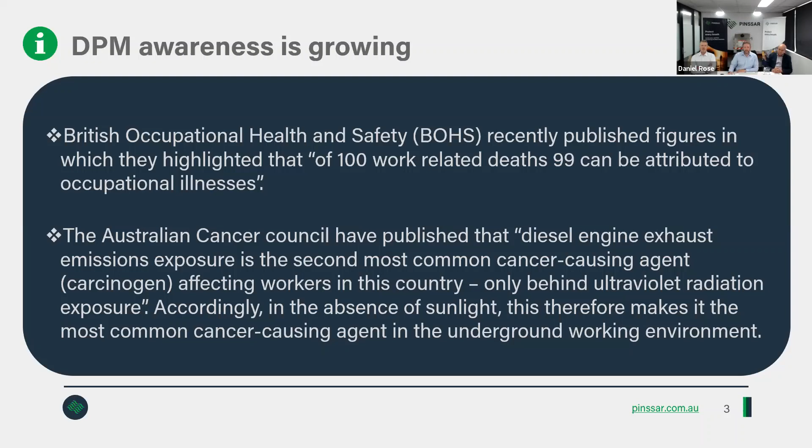They've published that DPM, diesel particulate matter, or diesel exhaust emissions, is the second most common cancer-causing agent in Australia, only behind ultraviolet radiation. So obviously, when you're working underground, you don't get exposed to the sun. So therefore, working underground, DPM is the number one cancer-causing agent in the workforce for underground workers. I'm sure that's very similar for operations around the world.

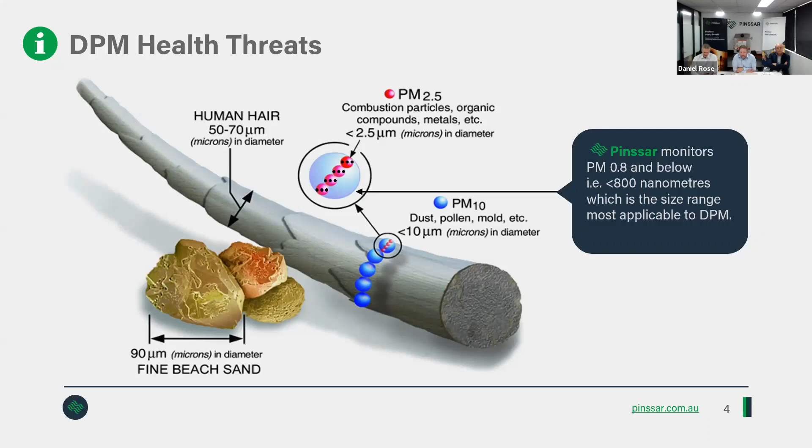You can see there the PM10, the blue dots, and that's your pollen, that type of stuff. And you can see the pink on those blue, which is your traditional dust particles that we monitor, PM2.5 and under. And then you can see some tiny black dots on those pink dots. That's representative of DPM. So again, quite smaller than the dust that we're monitoring. Comes in under 0.8 of a micron, or 800 nanometers, and is invisible to the naked eye. So very, very small.

And how that affects health: as you can see there, in 2012 the World Health Organization declared DPM a Group 1 carcinogen, the same risk category as asbestos. And you can see in that picture that the dust particles that, rightly so, are getting a lot of attention underground recently get caught in the human's natural filtering system, the lungs being the worst case, and that's where the potential for crystalline silicosis can occur.

But if you see to the right of that, the even smaller particles, being DPM, go through all those natural filtering systems of the throat, the nasal passage and the lungs, and directly into the bloodstream. Now you're talking about carcinogenic material getting straight into the bloodstream. That certainly is not what we're here to achieve. So having awareness of your DPM loads, and then making adjustments to your controls to bring those loads down, is certainly the best way to manage DPM.

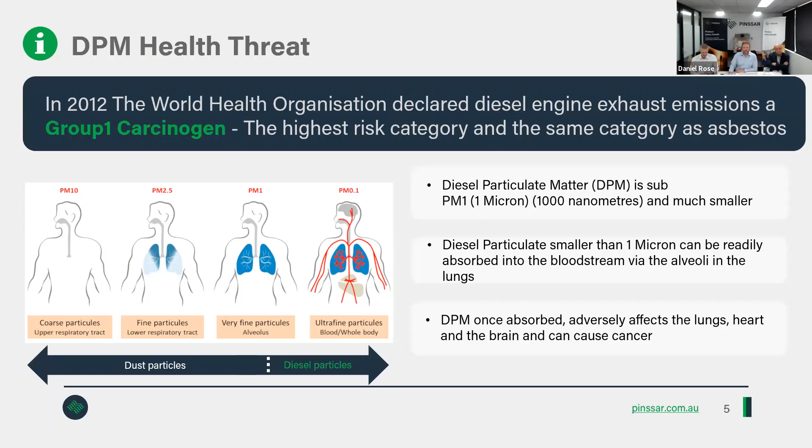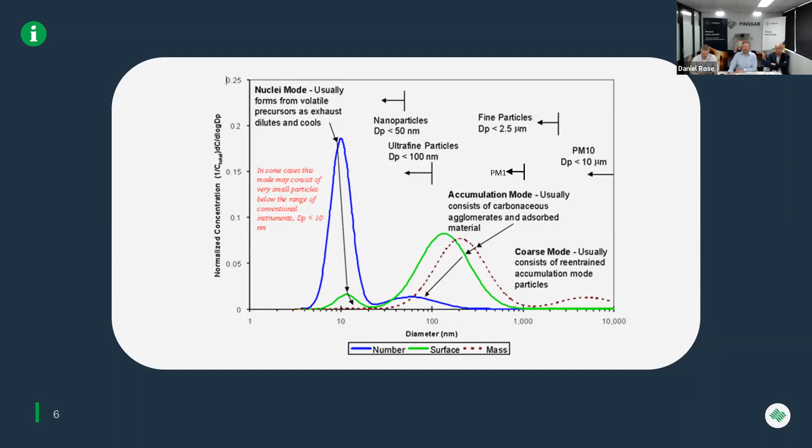But as it hits the atmosphere, the DPM particles agglomerate. They find each other and quickly stick to each other. So this peak is as it's coming out of the combustion process. Once it hits the atmosphere and starts to cool, they agglomerate, so the number of particles goes down because they're now joining together. But the mass and the surface of these particles increase. We're still talking about very, very small particles, still well under 1 micron. But that's where the workplace sees DPM in those atmospheric conditions.

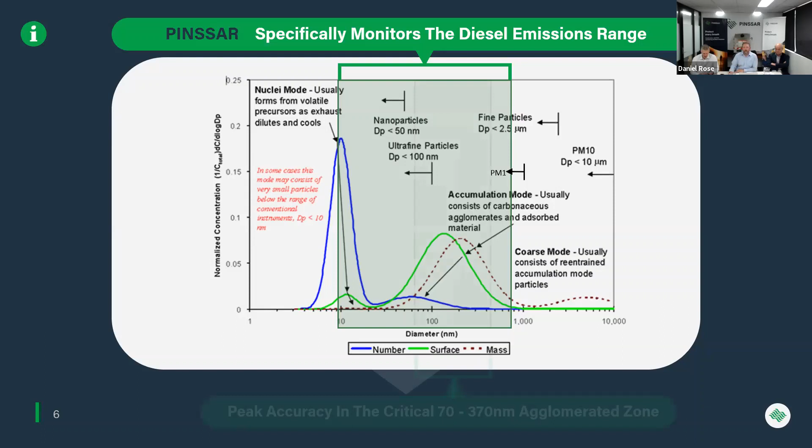So the monitor that Pinssar have developed is built from the ground up specifically to look at that range, and the peak accuracy, or where we focus the laser, is in that zone where the mass is at its peak. Most dust monitors, or in fact all dust monitors, rightly so, focus on around 1 micron and above. Their range can come down to around 700, but as you can see, they're not hitting the zone that you need to for DPM.

So there is some misconception out there that you can monitor DPM with dust monitors. Some can be fitted with devices to make that happen. But in terms of continuously monitoring DPM, there isn't anything else available other than the Pinssar that's been developed.

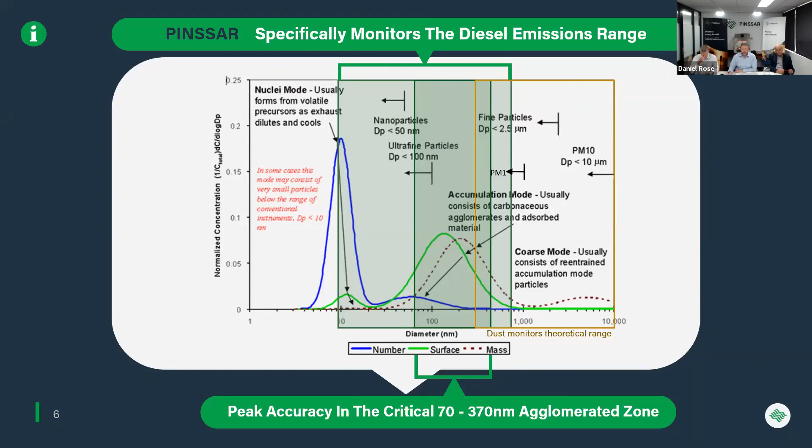So a very quick shot of where Pinssar started: it was around 2012, just after the World Health Organization declared DPM a Group 1 carcinogen. Francois, the managing director here, was working underground writing diesel management plans, and got the question from a mine manager: okay, we've got these plans in place, we're spending a lot of money, but how do we know that these mitigating devices such as filters and ventilation are working? And Francois said, well, you measure it. And he said, that's all good and well, but there's nothing I can find that can measure it on a continual basis. So that started Francois's journey.

He researched and came to the same conclusion, and then decided to partner up with a guy called Peter Knott, a very well respected hygienist in the industry here, to try and come up with a unit that would measure that, which took quite a substantial time. Part of that journey was getting in front of mines and tunnelling operators and understanding, if they were going to design something like this, what would be required. The number one constant that came back was low maintenance and reliability. They don't want to be maintaining these units on a regular basis.

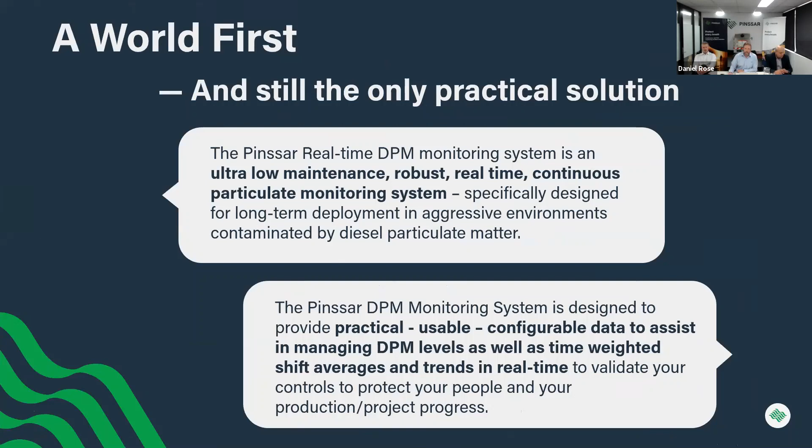So fast forward to 2018, it was commercialised, and these days we've patented it with 23 unique innovations. The Pinssar system basically consists of two things: the sampler, or the reader as we call it, and the dashboard. The sampler goes underground. It's the robust, low maintenance piece of equipment, and the dashboard is very configurable. It can go on a laptop, an iPhone, or through your SCADA system into your control system. So there's the reader, and there's the dashboard.

So just take a look at existing methods of monitoring diesel emissions. There's three main methods. One's tailpipe testing. It's a regulatory requirement. It's usually done in a controlled environment, such as a workshop on the surface, getting the engine to the right temperatures and things like that.

There's personal monitoring, again, a regulatory requirement. And that sits on your lapel or the collar of your shirt and takes samples of the air as it's breathed in. Unfortunately, once the person underground has handed that to the hygienist, it takes 2 to 6 weeks to get a sample back. And that sample will say, yes, you've had an exceedance, or no, you haven't. And even if it says yes, it doesn't say what part of your 8-hour shift you had that exceedance.

And then there's the ambient handheld monitor, which is great for taking underground and doing random checks and getting an understanding of the area. But all of these are random and intermittent and point-in-time validations of the conditions. So with any of those technologies, you're unable to manage your controls. So that's where continuous real-time DPM monitoring comes in.

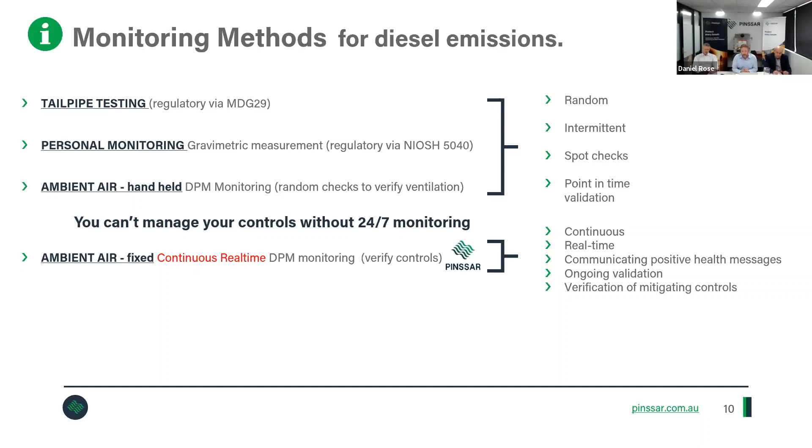And obviously you're getting a continuous picture of the ambient conditions underground, and you can move in relatively quick time if you see the trends moving to make some alterations. And ultimately the goal is to not get to exceedances. So if you see that trend heading up, you can do something about it before it becomes an exceedance.

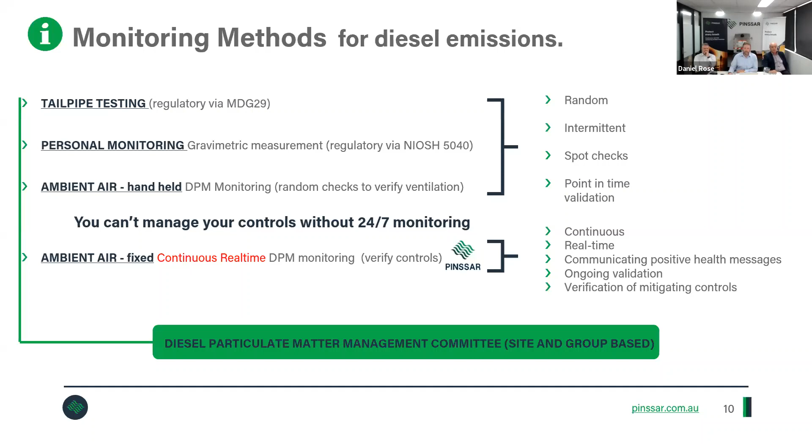We recommend that all those technologies are used, as in the DPM management committee. All great pieces of information that go to decision making. We're certainly not saying that Pinssar replaces any of those existing technologies. They are required from a regulatory point of view and do provide some important information. So Pinssar are now across 6 continents and going well globally, mainly in mining, but certainly tunnelling is doing an uptake.

So we'll jump to some regulatory support information. Obviously 2012 was when the World Health Organization declared it a Group 1. Since then, there's been advancements in tier engines and specific companies lowering their OELs or exposure limits, and then just through different periods. This is a bit Australian and English specific. The states in Australia have changed their levels, and then Canada we've got here.

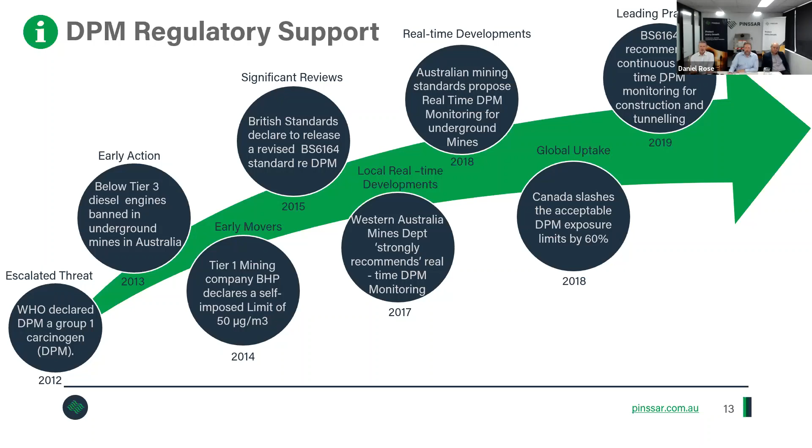But really, the big one that's starting to change the game is the British Standard 6164. So in 2019, they made a revision in that standard. Previously, that standard had not even mentioned DPM, but now it calls for real-time monitoring of DPM. Also in that revision, it put dust in as continuous monitoring required as well. Previously dust was called on, but not continuous monitoring of dust. So the British standards have now put those together, and they're saying it shouldn't be one or the other, it should be both. And calling for atmospheric monitoring.

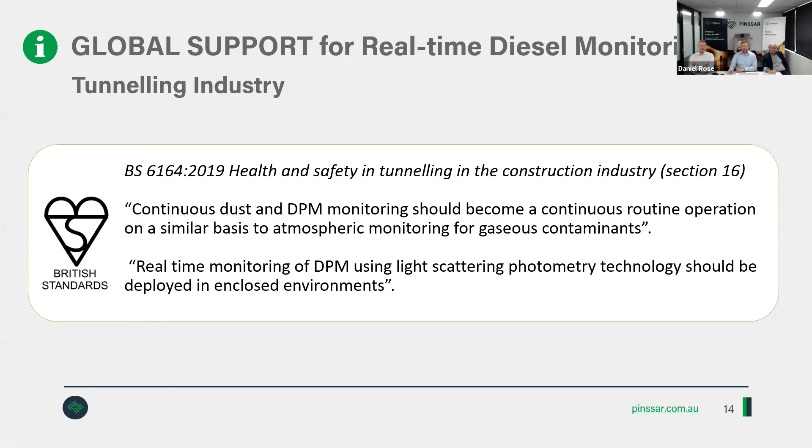So in terms of tunnelling, what that's led to is the project that's currently on in the UK, the HS2, one of the largest tunnelling projects in the world, and there's four different joint ventures there. As you can see, a lot of the major construction companies from around the world are involved in the HS2 project. And so the client, HS2, has specified continuous DPM monitoring in their tender documents, and therefore those contractors have obliged to that. It's still early days, only in the first mile of the first of 4 packages, but continuous monitoring of DPM will be a part of all 4 packages. So certainly setting the gold standard for the tunnelling industry worldwide.

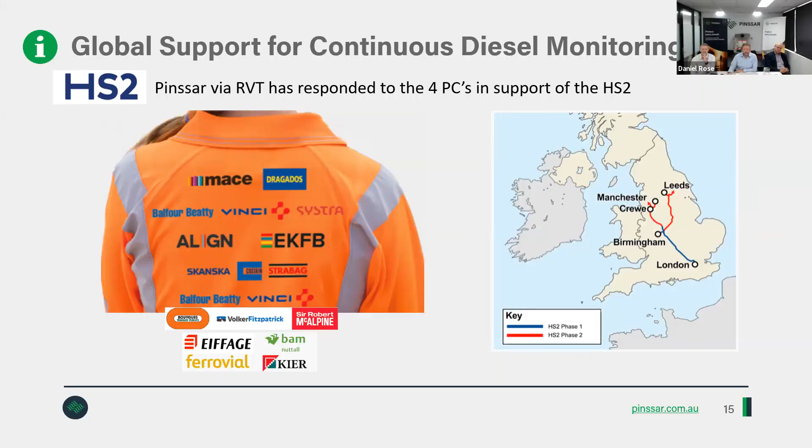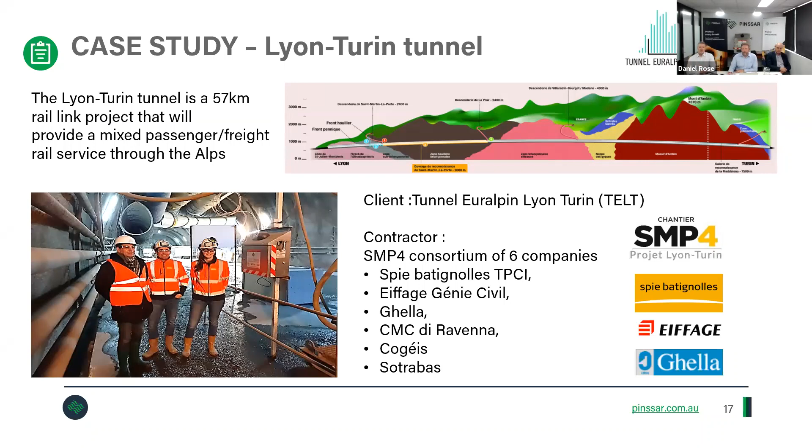So we'll run through a case study in tunnelling. This was a joint venture in Europe, under the Mont Blanc in France. You can see the contractors listed there, again some major players. So this is the TELT project, which is a 57-kilometre rail link under the Alps. The SMP4 scope, which was that joint venture of the first part of this project, consists of 9 kilometres of TBM and 3 kilometres of drill and blast.

And it was the drill and blast section that they were anticipating would produce a higher level of DPM, obviously higher than the TBM, but they felt that this may be higher than what they were prepared to handle. Thought it was an unreasonable risk to the workers. What they'd done prior to that is monitored gases and also personal monitoring, and some dust monitoring as well as weekly airflows, but not real-time continuous DPM monitoring to date. So they did some research, found Pinssar.

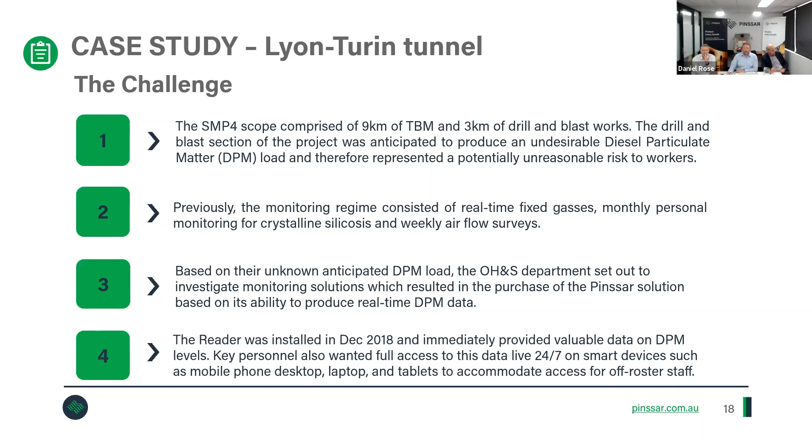The reader was installed in December 2018, and they immediately saw some benefits. So they started monitoring for 3 weeks. They averaged 180 micrograms per metre cubed. Then they stopped for Christmas for 3 days, and we'll show you a shot of the dashboard next.

And then the monitor kept monitoring over Christmas break, and that dropped down to 10. So they saw the difference between 180, which is well above the industry standard of 100, down to 10 over that period where they weren't working. So they came back from Christmas, they evaluated the data and the results, and they decided to do an investigation to get a better understanding.

Turns out in this instance, middle of winter, under the Mont Blanc, conditions are quite cold, and the operators had turned the ventilation down to become more comfortable, unbeknownst to them what effect that would have on the DPM load. So as I mentioned earlier, it's invisible, tiny particles. The guys turn the vents down. They think they're doing the right thing, but obviously increasing the risk of health problems.

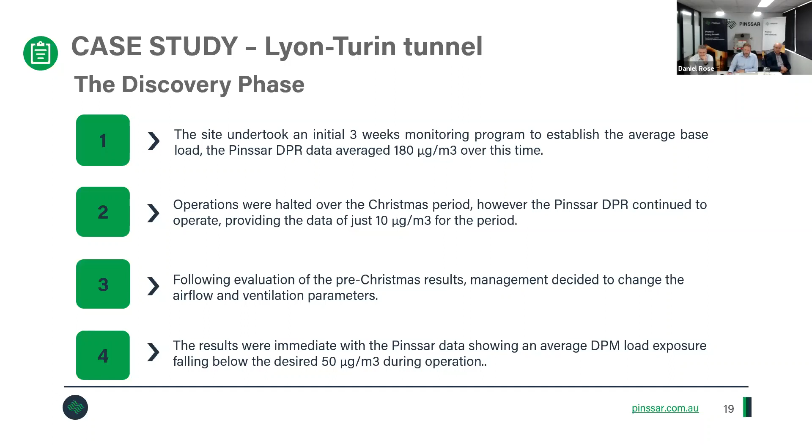So management got that decision reversed. They put the vents back where they should be, and then they monitored again and got it around 50 micrograms. And the guys actually put some coats on to keep warm. So you can see there on the dashboard, this is what we call a dynamic view. You can see those levels prior to Christmas, and then around the 10 during the Christmas break.

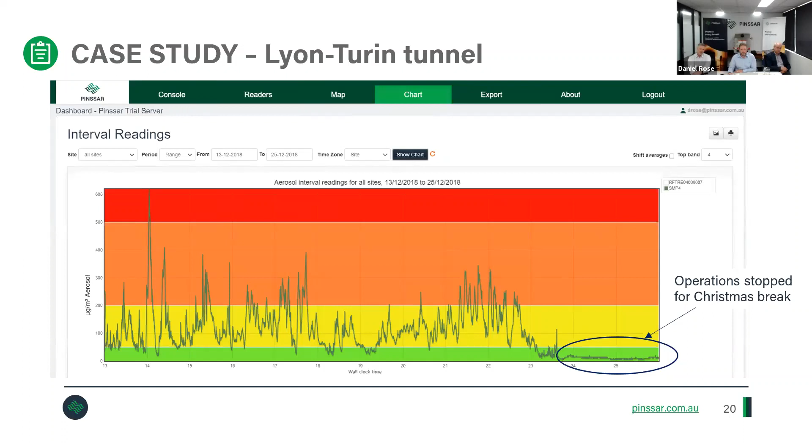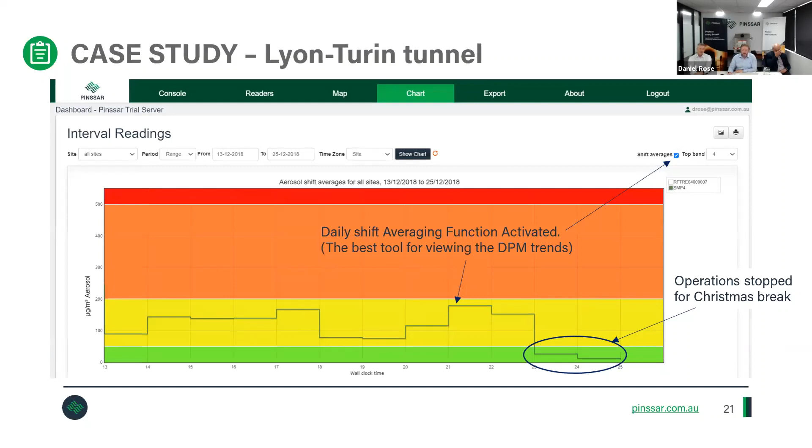This shot is what we call a shift average view, and is the one we recommend that operators look at first. So it gives a good indication of trend lines of what your DPM load's doing. And again, you can see the drop at Christmas. So we have a look post Christmas and how that went. You can see once they'd started reviewing and changed the controls, that came back down into their desired level of just under 50.

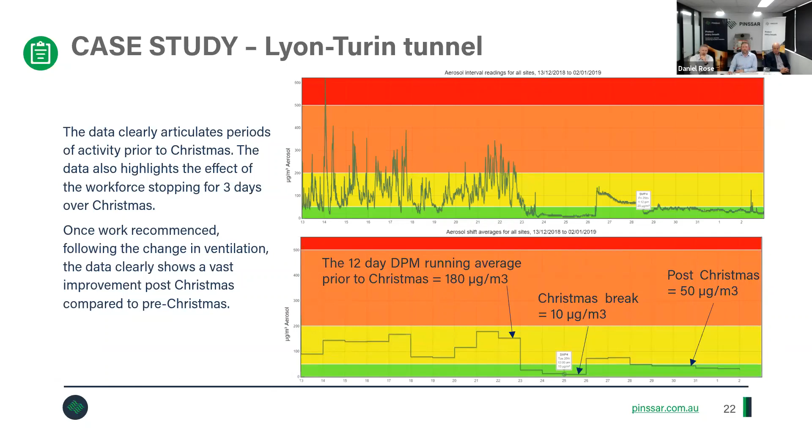So what they got out of it was, I guess for the first time, they could understand their DPM levels on a continuous basis. It enabled management to make a decision based on data. They also reviewed their PPE requirements for standard tasks, and also for tasks that they knew would take that limit over, and changed their processes and procedures for that. And they actually set some new company OELs around that as well. So that was 2018, and they're still using it today.

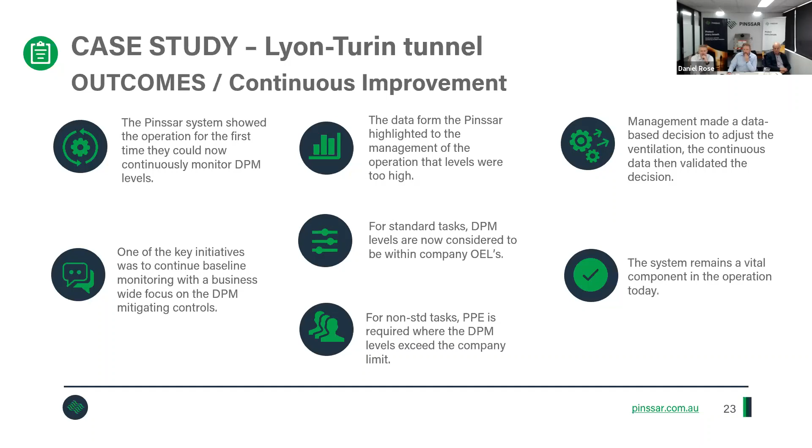And that project's about to embark on some significant packages, another 3 packages there at TELT. So I think 2032 is when they're due for completion of that project. So yeah, still a significant portion to go.

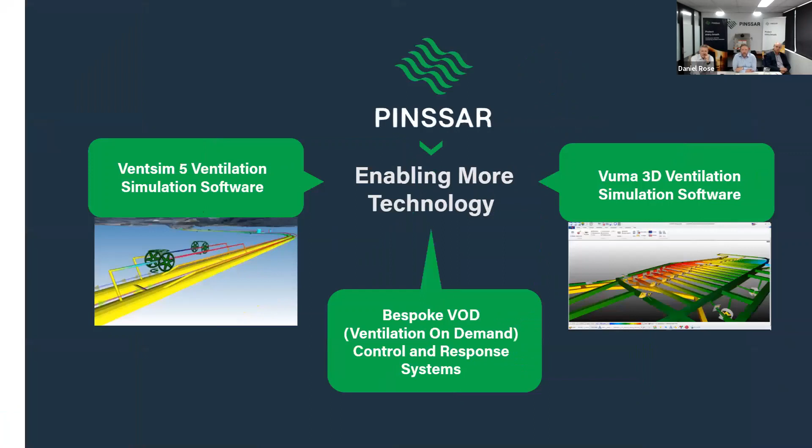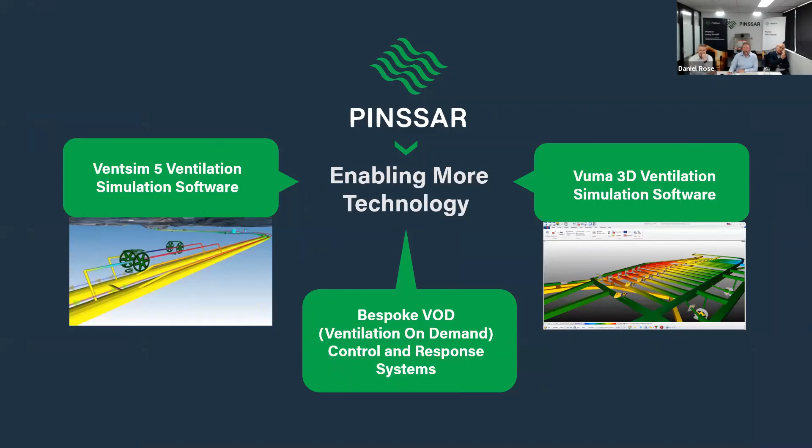Pinssar can also enable other technology such as modelling software like VentSim and Vuma, and also ventilation companies, or even individual operations, who are looking at ventilation on demand. So they can set up the real-time data from the Pinssar system and adjust their ventilation based on the DPM loads coming through.

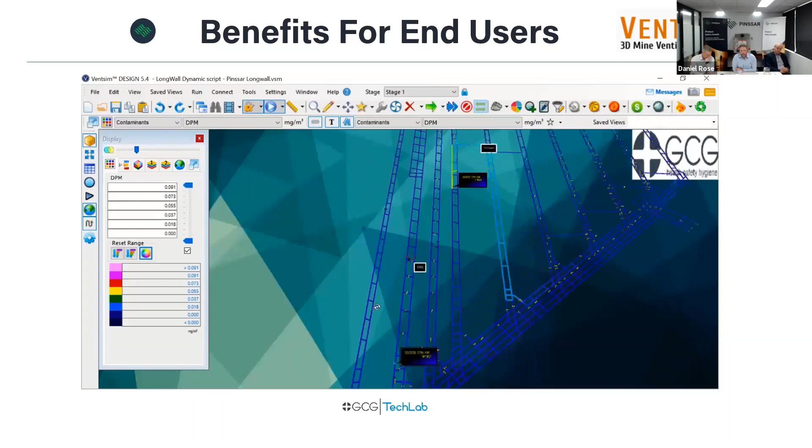Today I want to demonstrate how real-time monitoring, in this case fixed real-time monitoring data, works in VentSim. VentSim is used in mining as a tool to do long-term mine planning, ventilation planning, as well as day-to-day planning for the ventilation network. What you can see here at the moment is a longwall coal mine. The two call-out boxes here are where the Pinssar units are installed. I'll start this model off.

So what you're seeing right now on the right hand side here is the time. Every increment's kind of like a minute, and like I said, it's 1 day's worth of data. So I'll start this model off, and as you can see, the DPM's already spreading through the mine, and it's 20 minutes in to the model.

Zooming into a specific area, you can see there's a constant reading of a DPM of 0.04 more or less, and you'll see there a big spike come through. Could be that a machine has been working upstream of that sensor and maybe just pulling a load, and that DPM plume it created passed that point, and then that will go through the mine right out up to the fans, which are located here. So you can see as it gets closer to the fan, it starts diluting a lot because it mixes in with air that might not have DPM, and also mixes in with higher ventilation flows.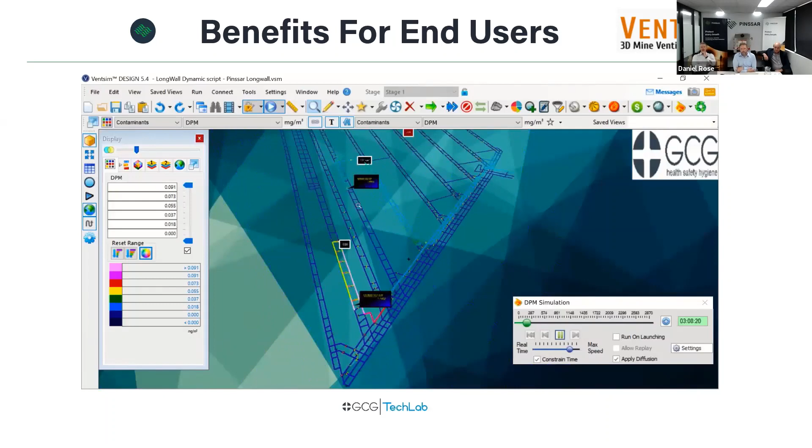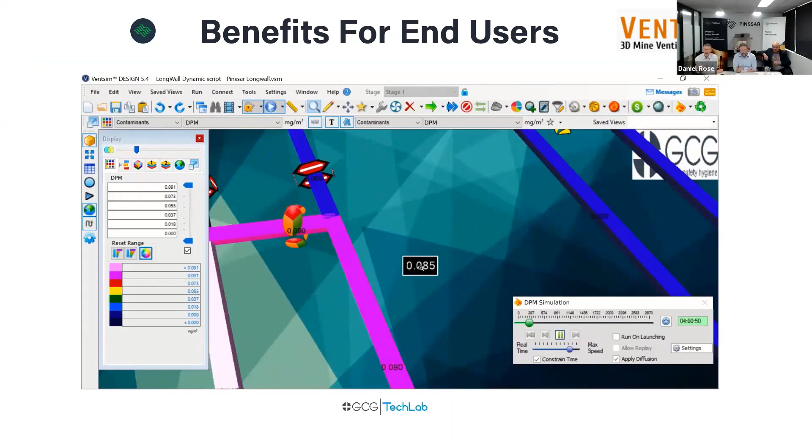Another nice function VentSim has is actually these data boxes. So this specific data box displays the DPM reading in this airway as a live function. So whatever it sees there, it'll display in that data box. Obviously, nice to have if you display this up in a control room or want to show it in a presentation somewhere.

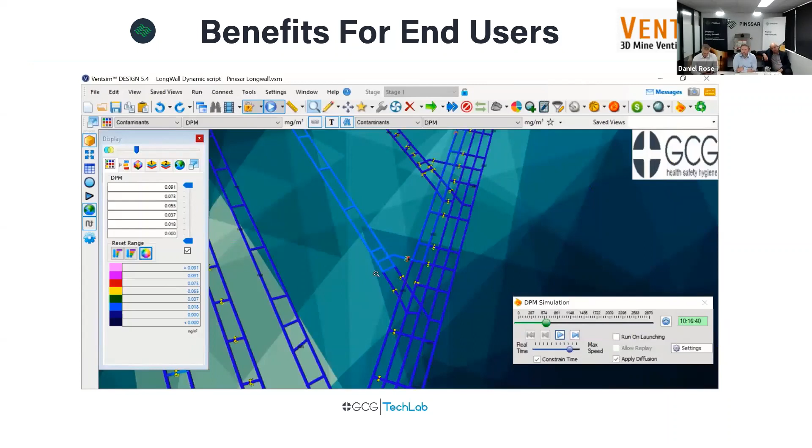To change your perspective on how we look at occupational hygiene risk is that we're looking at this in real time or very soon after the exposure occurred, so you can take action. Whereas currently, compliance monitoring is very reactive; there's not a lot a mine can do two weeks after an exceedance occurred, or it's often very difficult to find out what went wrong.

So it's very handy to try and incorporate this on your sites, and this can be used all over: coal mining, metal mining, tunneling, which I think is a really interesting one to have this in at the moment, as well as buildings or workshops that have fixed airflow.

So apologies, I didn't introduce that, but that was just a 3-minute video on Ventsim by a third-party consultancy group who operate in New Zealand as well. Pinssar don't have any affiliation with Ventsim or GCG, so that was an independent video, just showing how DPM can be used in modelling packages.

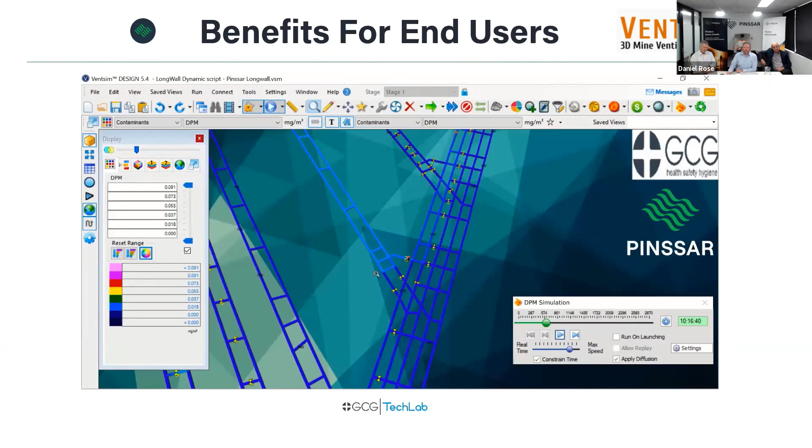Other technologies, such as situationally aware smart lighting systems, give a very visual indication to operators, users, and workers about health and safety, for example using real-time diesel particulate matter inputs for go, no-go zones within a district. That's become a really powerful tool, and many customers are looking to utilize this latest technology integration of diesel particulate matter with smart lighting systems.

So obviously a good visual there for the operators underground if they shouldn't be going into an area. We've certainly known about the tag board system and its reliability at times. This, I guess, is a much more visual way to control that underground.

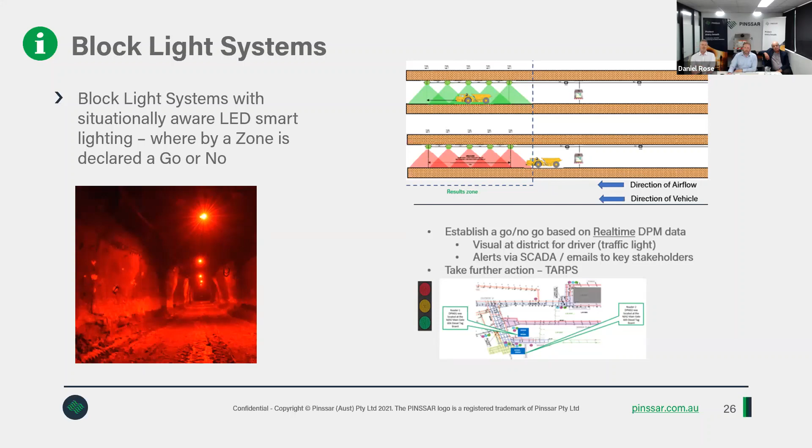So just coming towards the end, some recaps. Obviously, we're here to support zero harm in tunnelling. Tunnelling certainly struggles at times to get resources, and anything the companies do to improve the conditions will help with efficiency and morale, and with the local community also, and can eliminate risks of shutdowns.

We've certainly seen those in Australia due to DPM in tunnelling, where sites have walked off for a number of days because they can smell diesel. Again, not a data-based decision. This can help take that risk out of the equation. And like I was saying before, if you trend, you hopefully don't get to the point of exceedances. On the flip side, you might find that your DPM load's quite low and doing well, and that may give you the ability to introduce more equipment based on the data.

Probably an important one: the international leading practice for tunnelling in terms of DPM monitoring is BS 6164. We're sure that other jurisdictions will follow, and certainly the Commonwealth countries would be looking to BS 6164 as best practice.